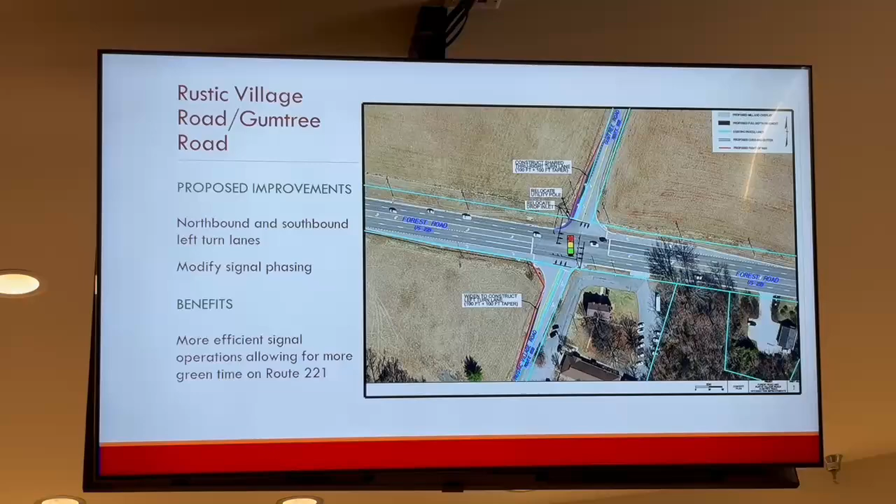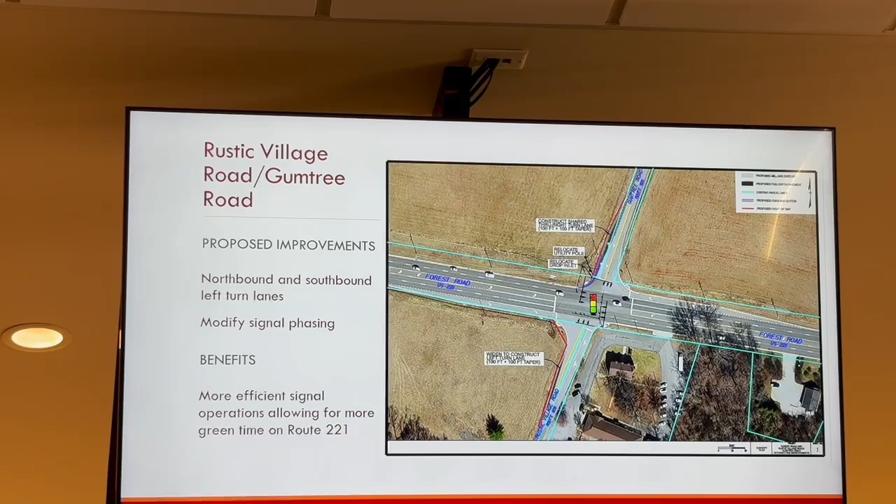Village, Gumtree intersection. What we've shown here is simply the addition of left turn lanes in the northbound and southbound direction. And what that does is allow the signal operation and phasing to be changed to be more efficient, and you can move more traffic through on 221 into this stretch where the Walmart is, from Ambassador to Cloverhill.

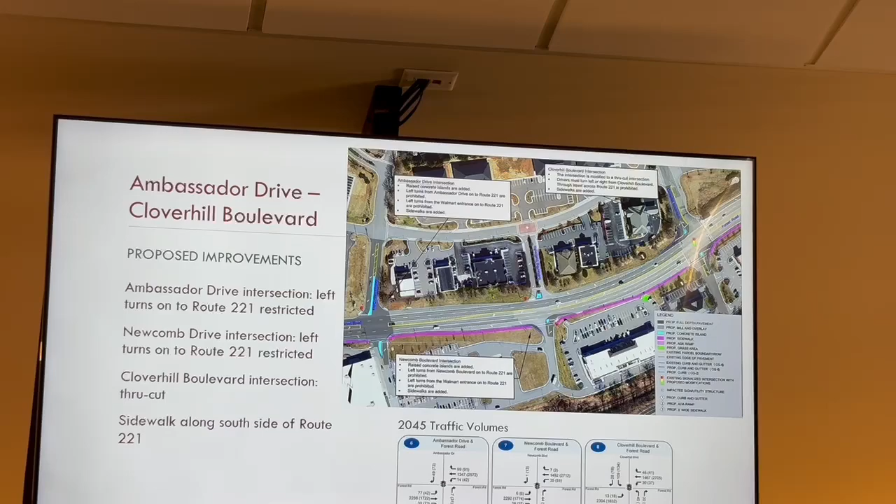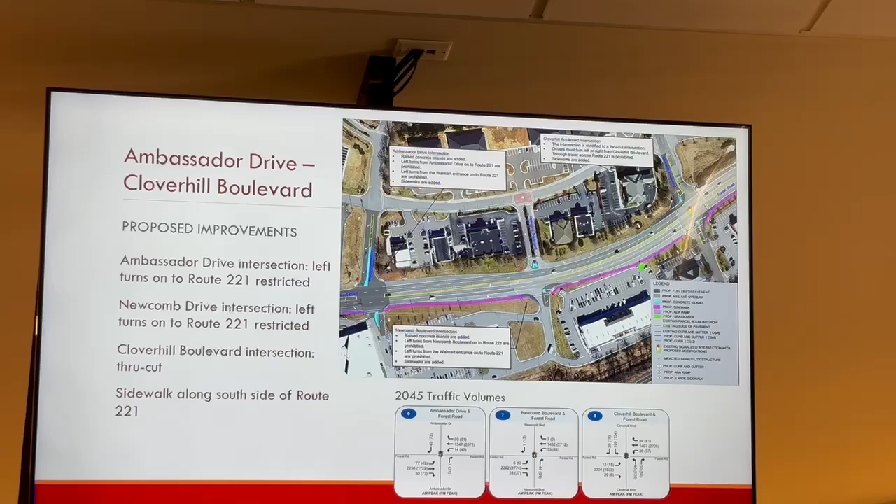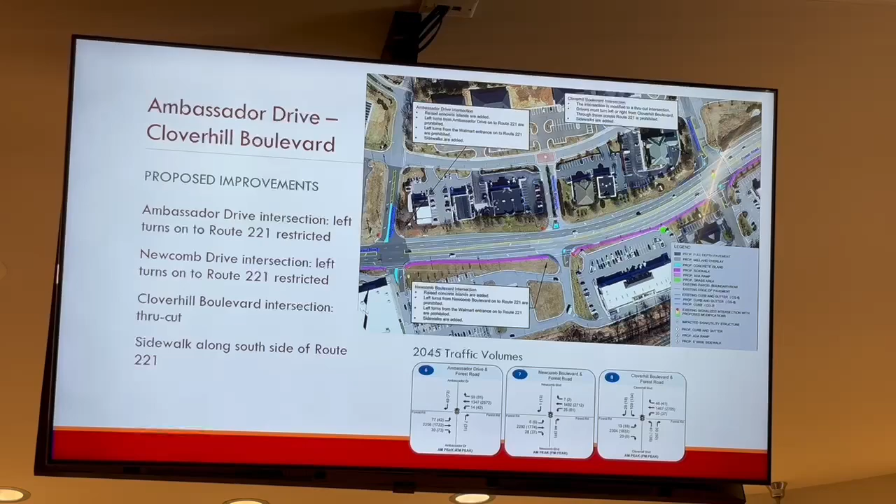What we've shown here restricts the left turns from the side streets from Ambassador and Newcomb for the non-signalized intersections. Those were the crashes there, largely based on those left turns. This does still allow you to turn right off of the side street onto 221. It also still allows you to turn left from 221 onto these side streets. That was not as challenging safety-wise as the other movements.

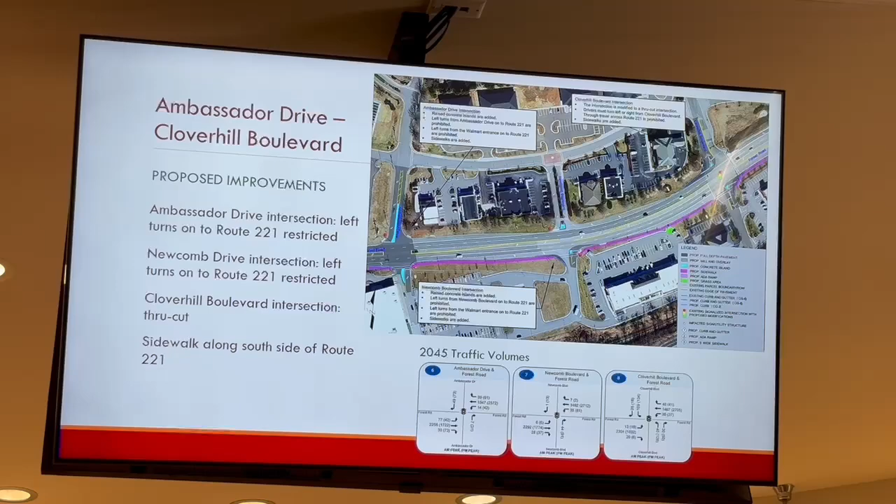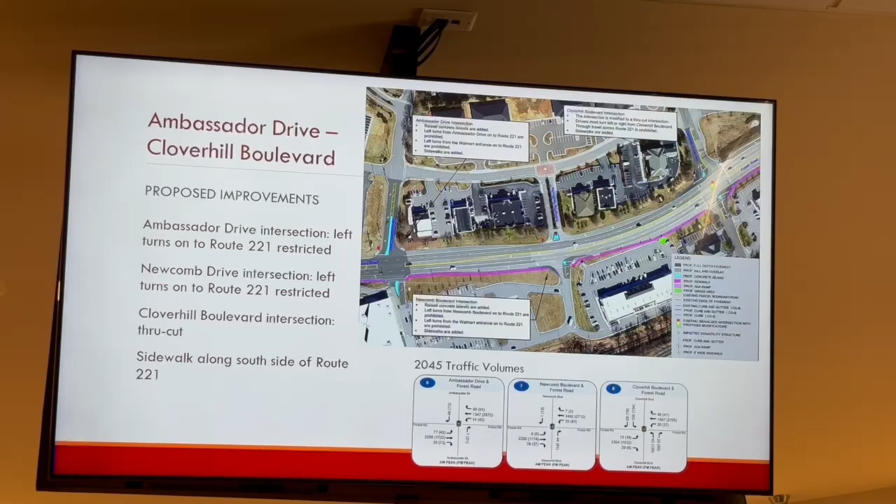You'll see here there's a sidewalk shown. I believe this is one that VDOT has been working on for quite some time, working on getting some funding for that. And then this one also does include that through cut concept at Cloverhill to improve some efficiency. One of the things this area has going for it is a parallel network, that if you can't turn left in Ambassador, you can get to other locations where you can turn left and make that movement. There's that parallel roadway that allows that.

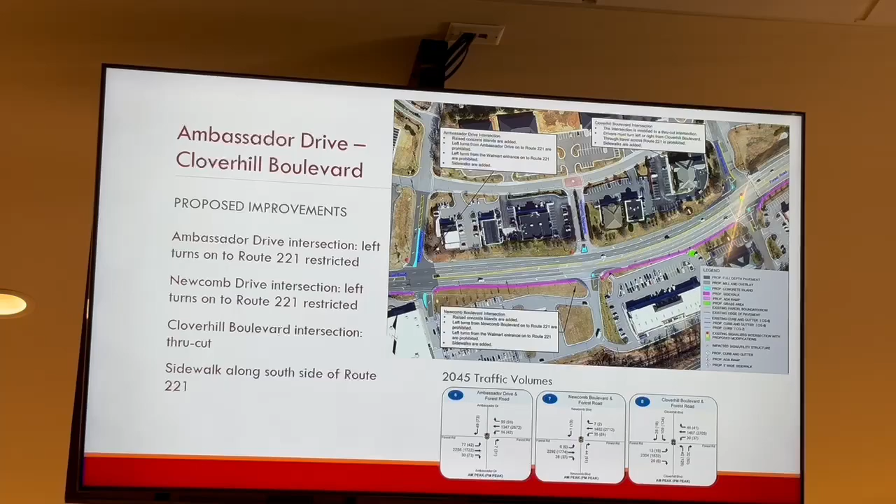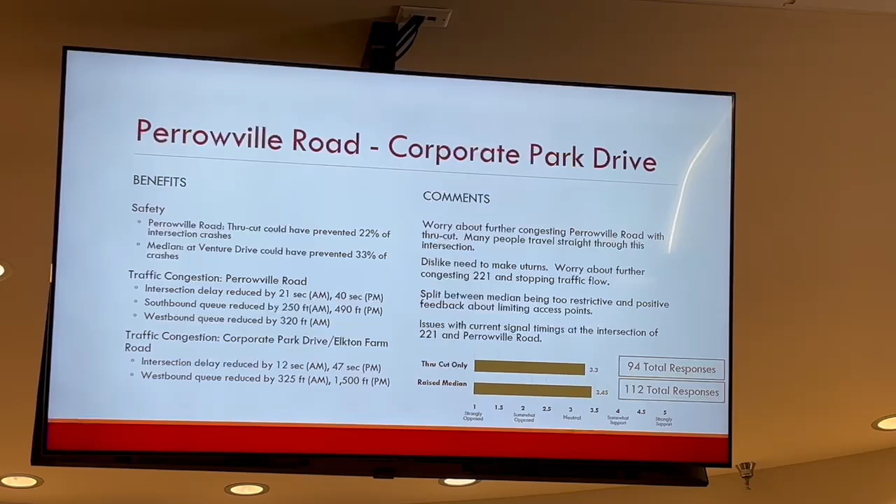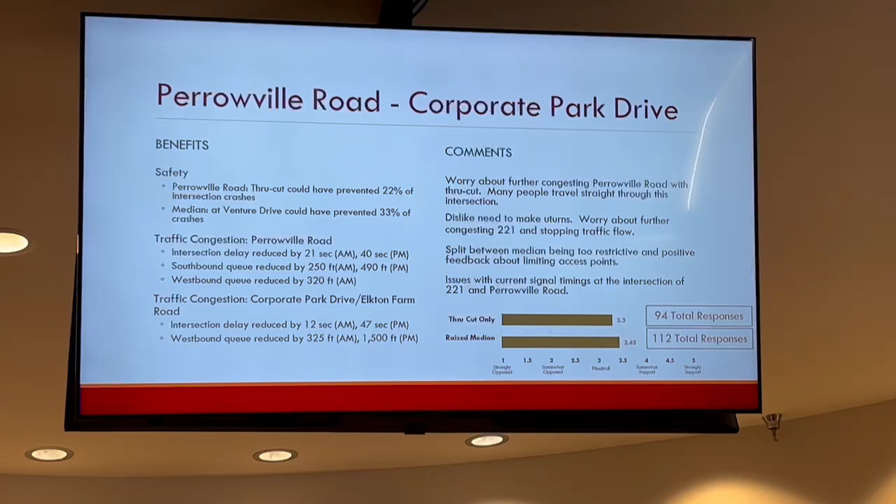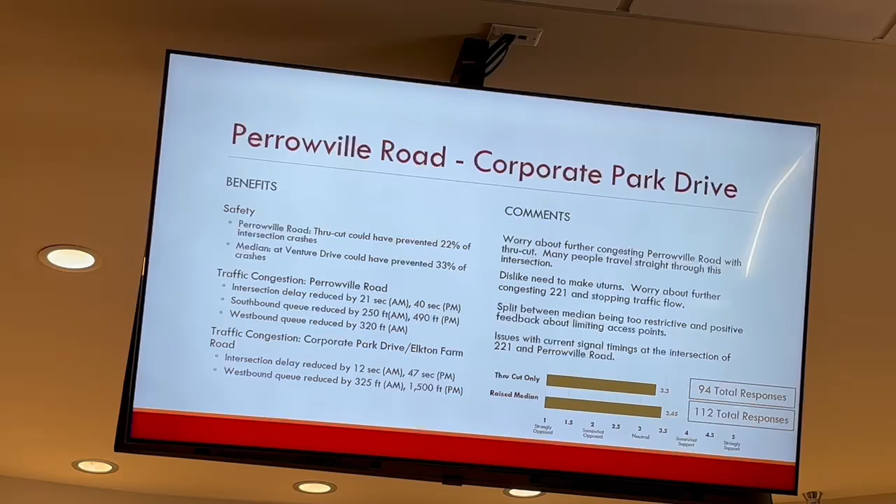The comments we got in the survey, and I will say the comments that we got were thoughtful. Sometimes we get very positive, sometimes very negative things, but I think it reflects that the people who took the survey drive the corridor and they know what's going on. They're worried about making more congestion with a through cut because then those movements have to shift to different directions, different options. It's a valid point. Some people commented they don't like U-turns. Also a valid point, personal preference.

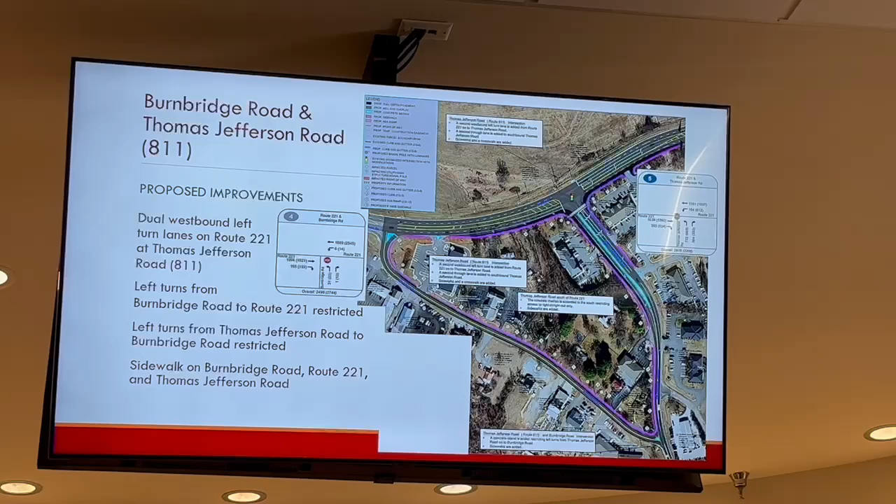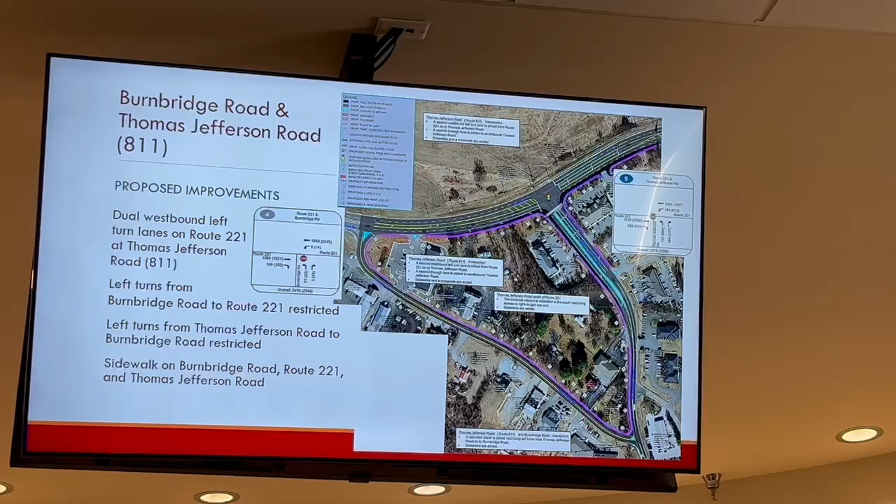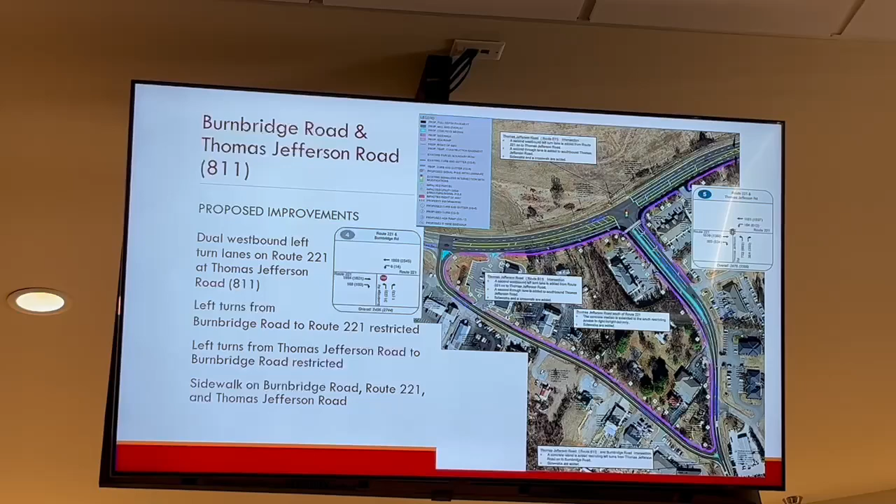Burnbridge and Thomas Jefferson. So in this location, what we showed the public and got feedback on are adding a second left turn lane from 221 to turn south onto 811, or Thomas Jefferson, and then restricting the left turns at that southern intersection from Burnbridge onto 221. Very few people do that anyway, so that is not a significant inconvenience to drivers, but it's a safety improvement.

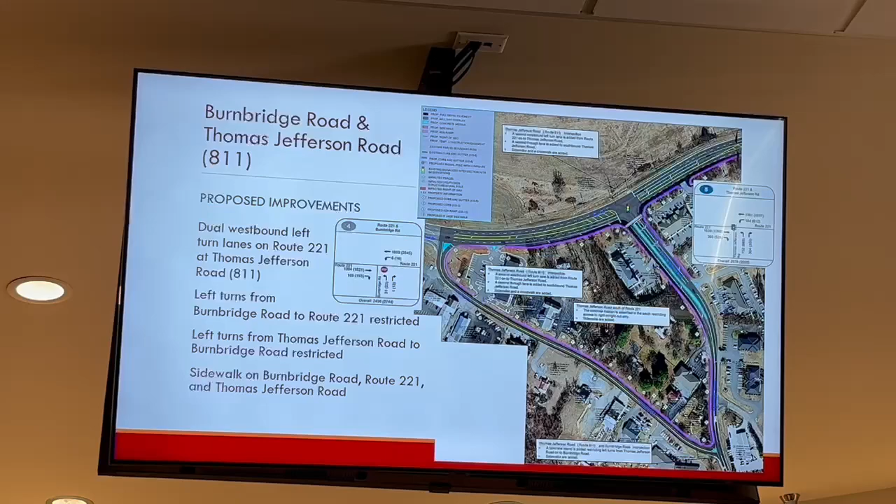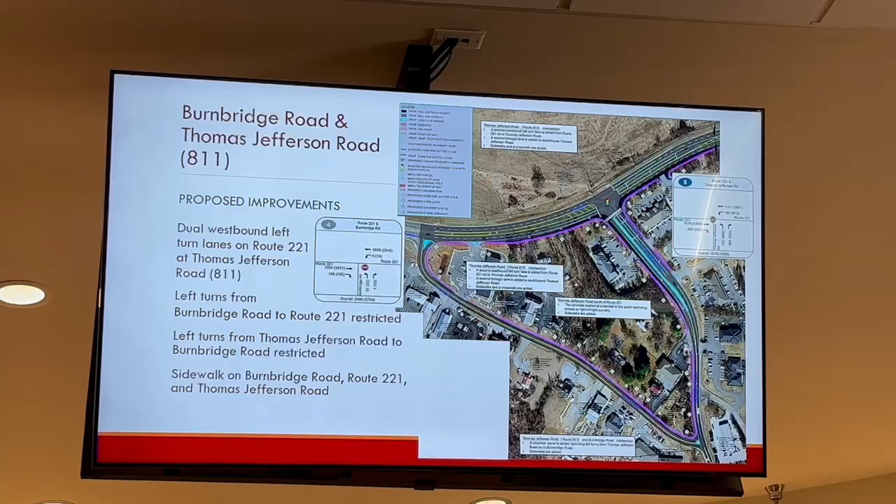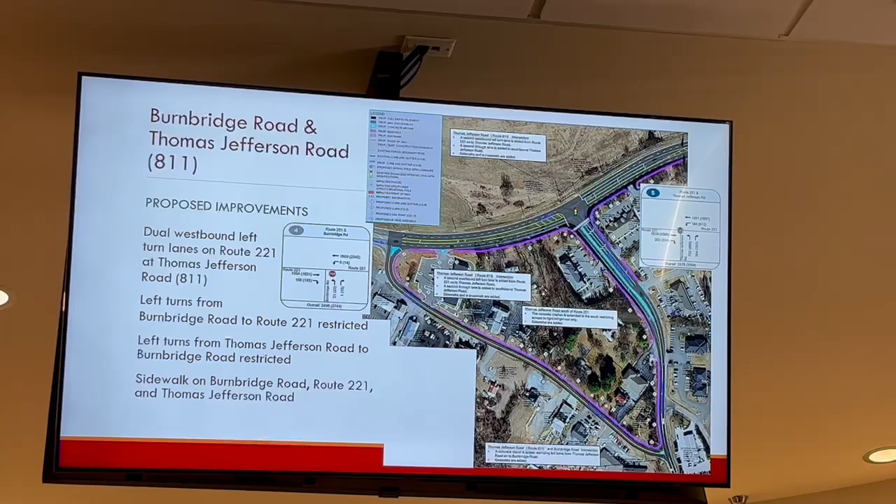But the bigger issue here, numerous studies have found this, is that southern intersection where Burnbridge and 811 meet. There is a cluster of crashes there, largely due to the fact that people are trying to turn left from 811 onto Burnbridge and getting rear-ended. And it's very difficult to put a left turn lane in there because the bridge is right there. With all of that in mind, that is why that restriction for those left turns from 811 onto Burnbridge is there. It's really a safety improvement.

Sorry, Mr. Chair. Do you think?

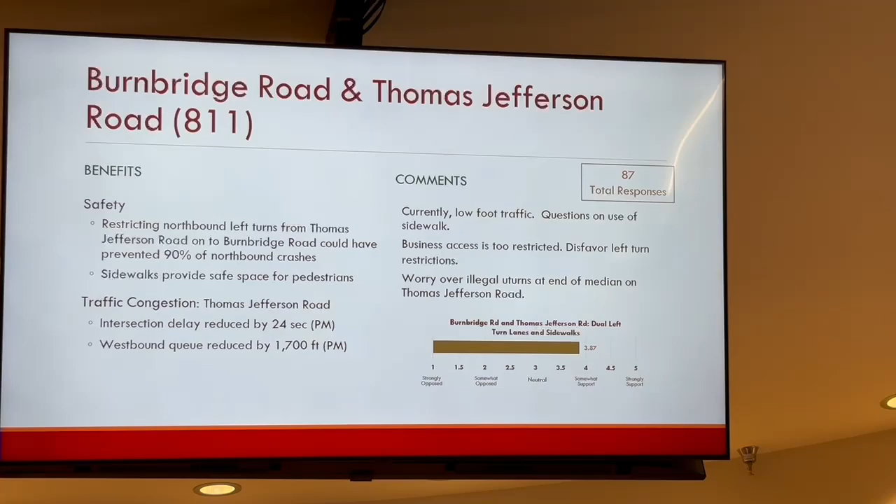One of the comments here on that concept, which I did not highlight, was about sidewalks in the area. Generally they would be great, especially considering some of the businesses that are there now. But there was a question, is that really needed there? It's a reasonable question.